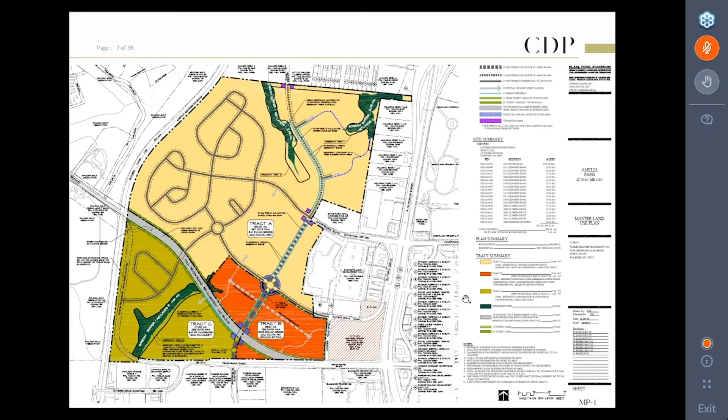We're going to go to the next and highlight Tract B to the northwest and Tract B to the northeast. I wanted to show this picture because of some of the existing site conditions as it relates to topography that we're having to deal with. Up to the top left, you'll see a stormwater pond that handles the stormwater for the development in the residential areas there, and that is very sensitive to the water runoff associated with parcel B in the northwest, which we'll show you a site plan here in a second.

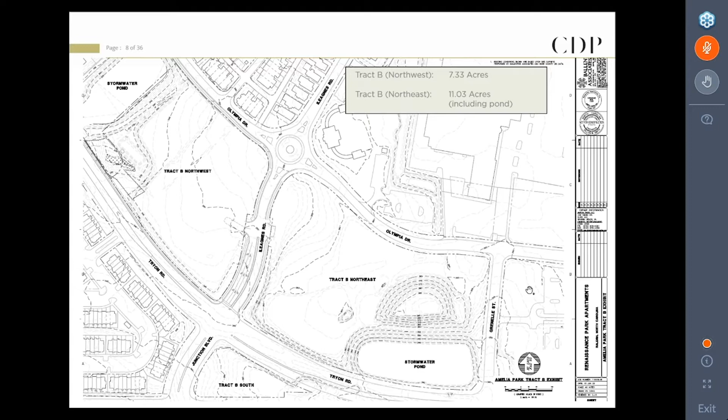Tract B, the northeast side, we also want you to be cognizant and understand the requirements as it relates to this tract, because potentially it does limit sizing. We'll talk a little bit about what our projections are and what we would like to do from a potential rezoning here, but we'll show you that in a second.

Here is the Renaissance Park Apartments, Tract B. You'll see a new branding name that we'll be dealing with here in a minute, along with the elevations and a little history about that. This is 222 units, 4-story with walk-ups and elevators.

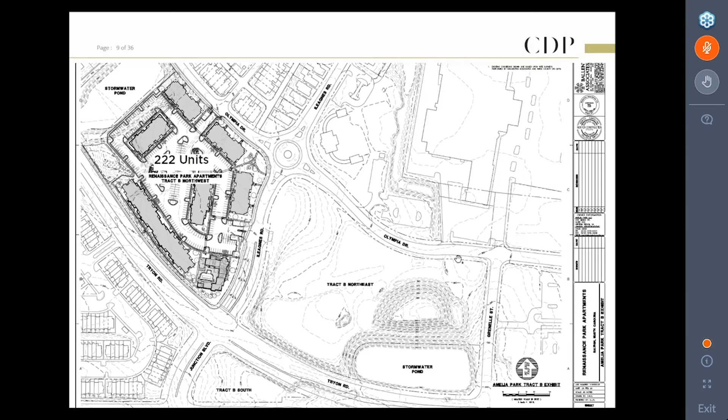You'll see the longer building along Tryon Road will front per the requirements of the zoning along the street. You also see along Olympia the entranceway, which had to be aligned up top there with some special conditions as it relates to the existing ordinance. The bottom right-hand corner of the site, parcel B, would be the clubhouse, and you'll see some elevations of those here in a second.

The units, the highlights of the units are pretty much high-end. They're pretty much self-explanatory through this.

There is a community feature within the apartment community. There were some discussions and questions about whether this amenity package was just for the apartments, and the answer to that is yes.

We'll have a large fitness facility and yoga room. With the COVID types of programs we're having to deal with, we're modifying and looking at all aspects of the clubhouse. It will have a lounge and a grilling area, a fire pit, pet washes, and a resort-style saltwater pool and sun deck, which you'll see here in a minute.

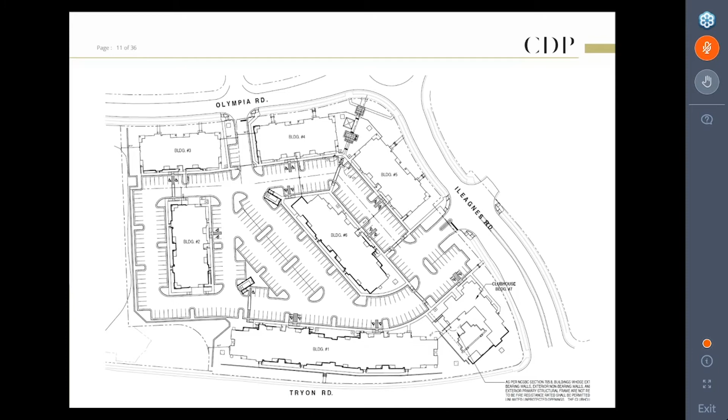We highlighted this a little bit to show you the locations and the parking and how the interaction will be with all aspects of the site.

Now I want to introduce the name, which is going to be 'The 99,' and you see in the background some aviation type of product. I'm going to let Scott Helmuth highlight and talk a second about the name and how we came up with this as he goes through the slides.

Thanks, Craig. Thanks everybody for joining us here today. As most of the neighborhood residents might know, this Renaissance Park area was all once the Raleigh Municipal Airport, which was founded back in 1929. So when we were trying to brand the apartments, we looked into some cool ways to evoke a sense of placemaking tied to the history of the past.

So we kind of decided to tie into the old Raleigh Airport, had some cool elements, some interesting historical avenues, and we kind of ended on the 99.

Now the 99, a little bit of history about the airport: it started known by the Curtiss Wright Flying Group, and was actually christened by Amelia Earhart in the early 30s as kind of an opening ceremony, so to speak, of the airport.

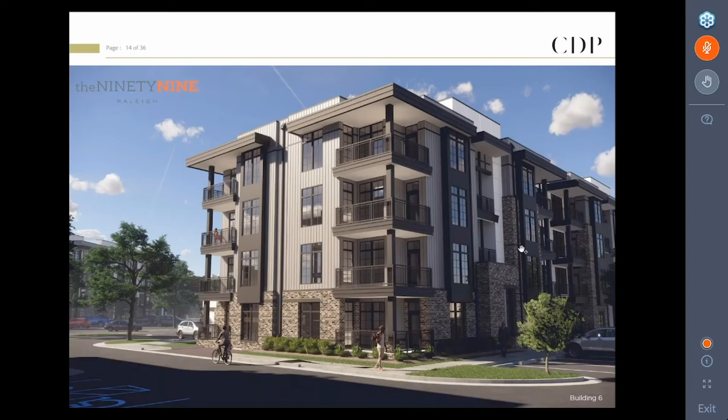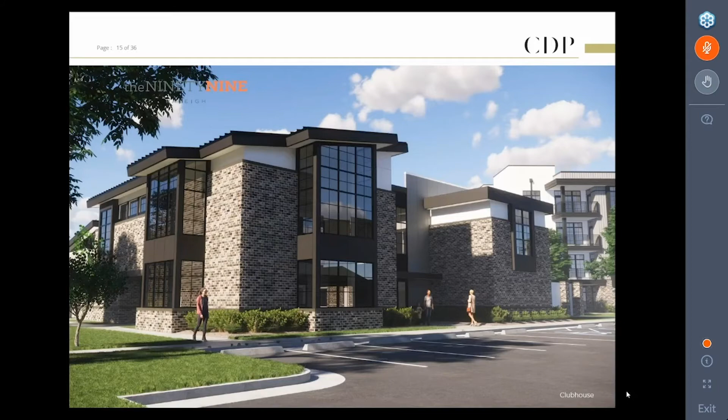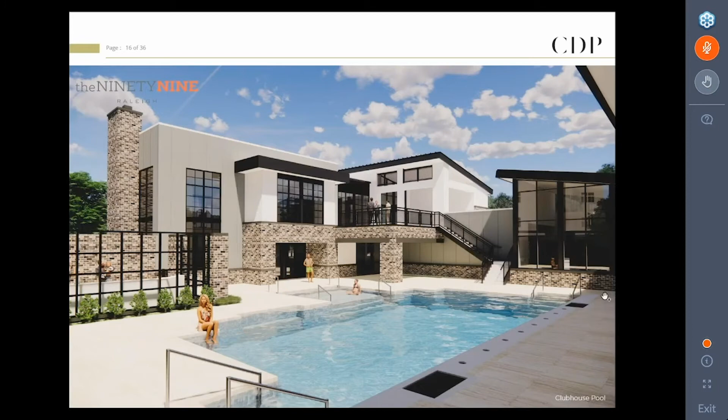You'll be up in the air a little bit, and you'll see this is the look of the clubhouse from the front entrance area. This is the pool and amenity package that will be adjacent to the corner of South Tryon and Ileagnes.

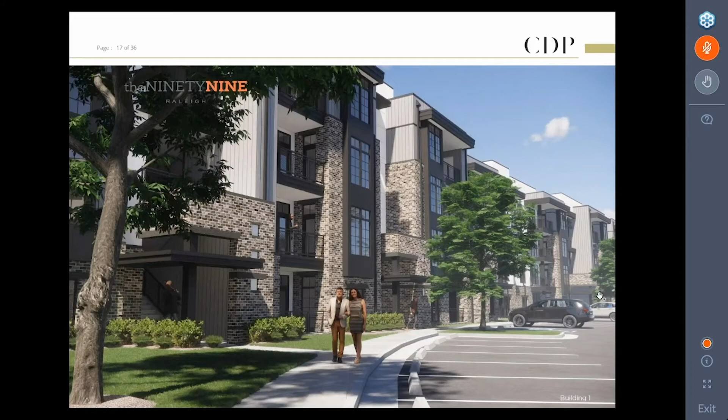This would be along Olympia so that you can start to see some of the materials that we're using here. Same under this area.

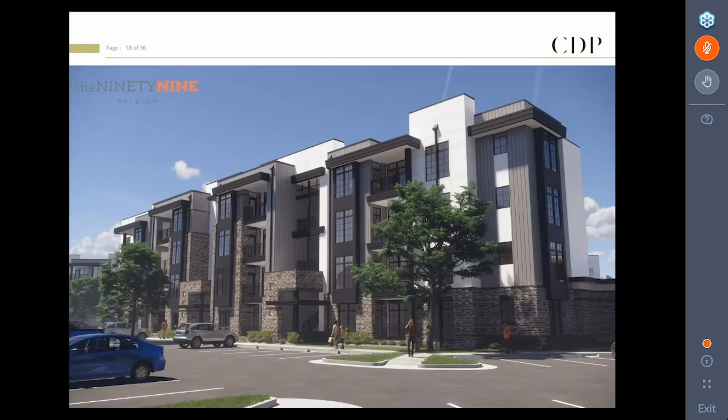I think a lot of the questions that we have been receiving had to do with what's the plan going forward, how do we integrate the retail uses, mixed use programs, etc. And what we're going to do is...

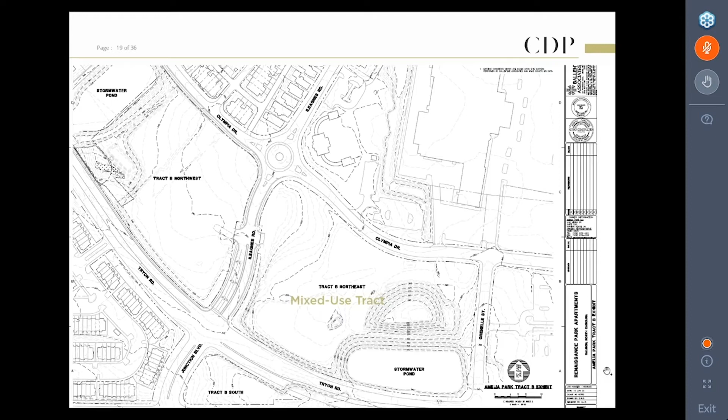attempt to kind of revisit the whole need analysis of this parcel. We understand some of the commitments that the original master plan envisioned, and we believe that it's extremely important to have mixed use product in the area. And what we're going to try to do with you residents and team members, we're going to start calling you team members...

is we're going to be very transparent as it relates to various feasibility studies that are underway, and we'll review those with you in forums, hopefully face-to-face, in the upcoming weeks and months.

One of the things that we've found initially was that we wanted to go through a higher density and potentially look at a rezoning for the quadrant. We believe in some of the examples that were listed below. We'll show you some of the projects that we've done, and we'll show you more.

We do believe that increased density—you're currently at 280,000 square feet—we think that potentially could go up to 750,000 square feet. We have to verify that.

There's issues associated with that. We have to make sure that our traffic impact analysis is handled properly. We have to collaborate with the city council and you as residents.

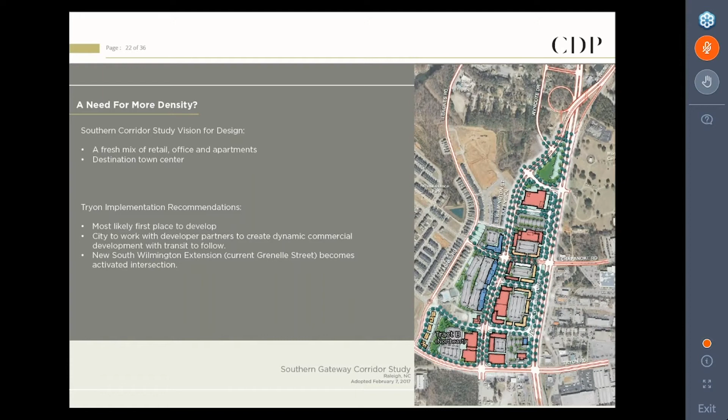So what we're going to try to do is show you some of the things we have in play right now. Again, some of these are schematics, in site plan approval, and massing plans. They're not necessarily going to be architecturally exactly like this, but we'll show you.

This is the first part, and the reason we picked this one is that it's about 10.85 acres, and it's going to house approximately 260 for-sale condos, about 35,000 square feet of retail intermixed with some townhouses, with first floor retail throughout.

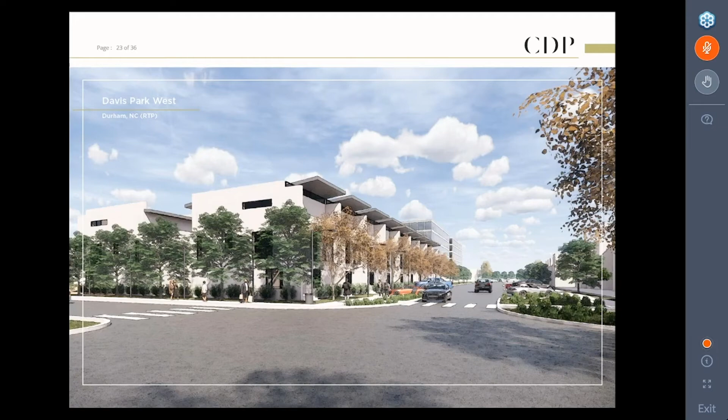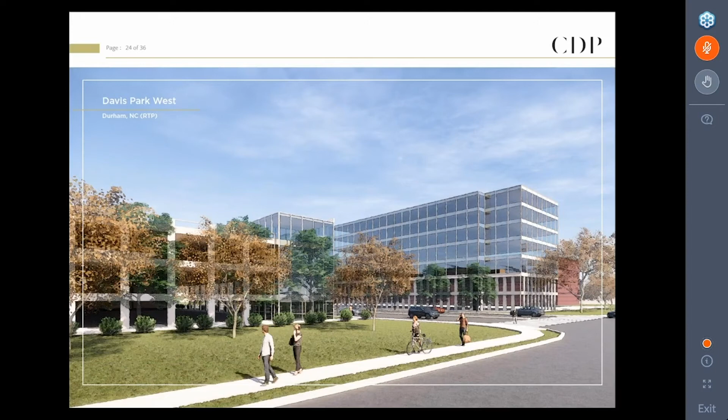This street is actually called Finsbury, where the cars are going, and to the left is Marion. This is at the intersection of Marion and Davis Drive, and you can see again, this is a massing plan on the right-hand side. That would be a condominium type of product with parking underneath.

This is a different schematic design showing a combination of sketches that would have retail on the bottom floors. On the left-hand side, all the way to the top is a grocer. On the right-hand side, down to the bottom left is a restaurant, and I'll call it a retail establishment. In the middle, you'll see that's where the lake will go, so we actually create a lake there.

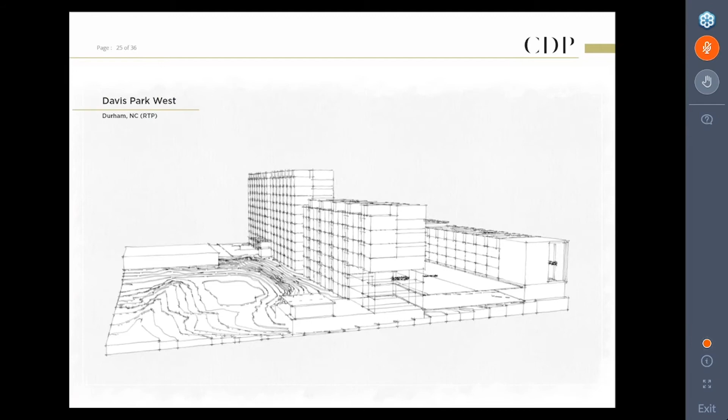The high-rise buildings go up to 145 feet, and there's mixed use within each quadrant — offices, condominiums, and retail along both of the streets. Some of you have asked about retail in the initial apartments, and this is why phase 2 will have the majority of the retail in it.

Now, if we get the rezoning and everybody's in favor of that, there'll be many more residential components to this, and many more office and retail. We've already been pinged by some medical entities that want to take a look at this area, and this fits a hole in some of their future plans, so we feel comfortable with that.

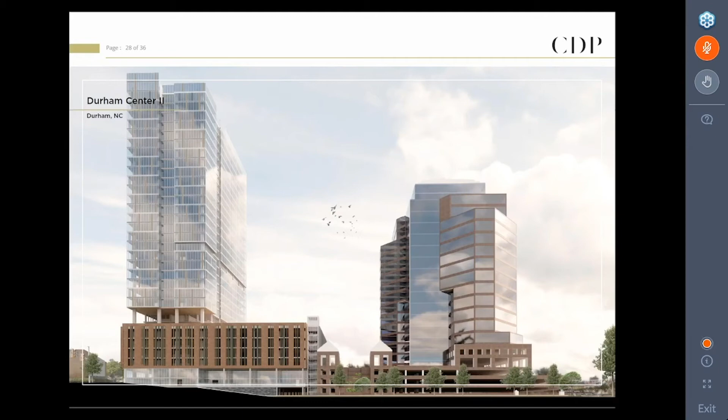This is an interesting project we're in the middle of right now in downtown Durham. The reason I wanted to show you this is because Perkins & Will, the architectural firm, has been involved with Kimley-Horn on this, and this is a height issue. This one actually goes 34 stories, but we have retail on the bottom floors because of the elevations, and then a parking deck that would be tied in, in conjunction with the City of Durham theaters that are around and across the street.

And then the apartments, these are actually apartments but could be turned into condominiums, with the amenity floors on the 10th floor, which would be about 29,000 square feet.

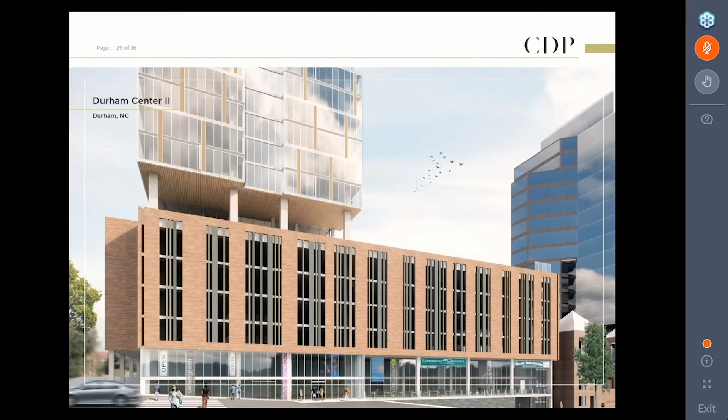This project was 255,000 square feet of space. It encompasses a Harris Teeter, UNC clinics for medical clinics, and also has Wells Fargo advisors as well as branches.

We're actually in the process of a rezoning here to include another 150,000 square feet of additional space with condominiums and office. So we're very familiar with the mixed use quadrants and how we have to do it. We were one of the innovators way back, 20 years ago. In fact, this was the first real true mixed use in Chapel Hill.

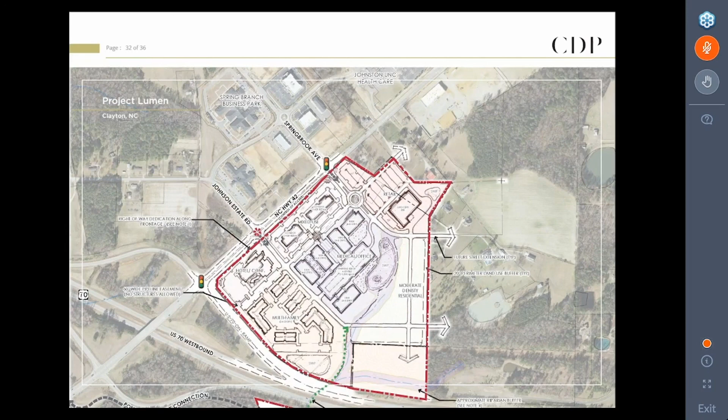So we hope that we have answered some of your questions. We hope that we have shared with you some of our thoughts. This is not the last time we'll speak. We want to be able to speak almost with you when you have your homeowners association meetings and keep you up to date. We want to try to be involved in some newsletters. We want to be involved on site, and we are available at any time.